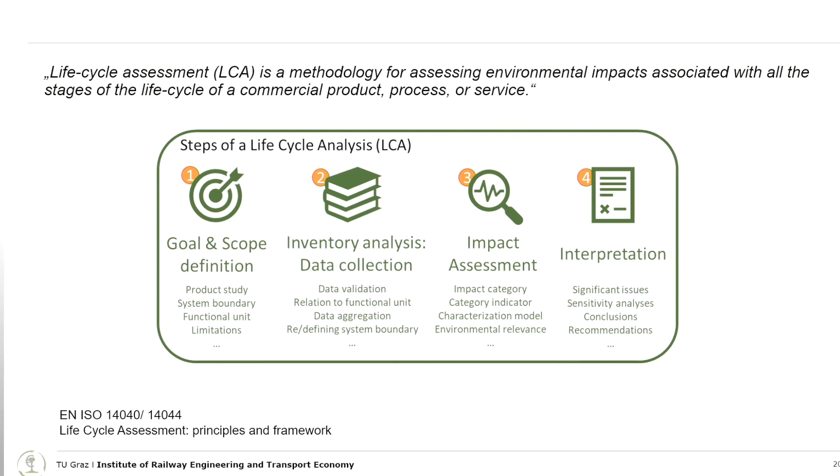Life cycle assessment is clearly defined in European regulations with its principles, frameworks, and how to evaluate and how to execute it. So the big advantage of life cycle assessment is that figures and results in the end are really comparable and transparent. The first big step of life cycle assessment is to define the goal and the scope of the study. So in our case, railway infrastructure assets.

The second big part is the inventory analysis. This is a really big part of data collection where we have to assess all the masses which are installed in railway infrastructure, also all the transport and associated processes to it. So this is a really big part of any life cycle assessment.

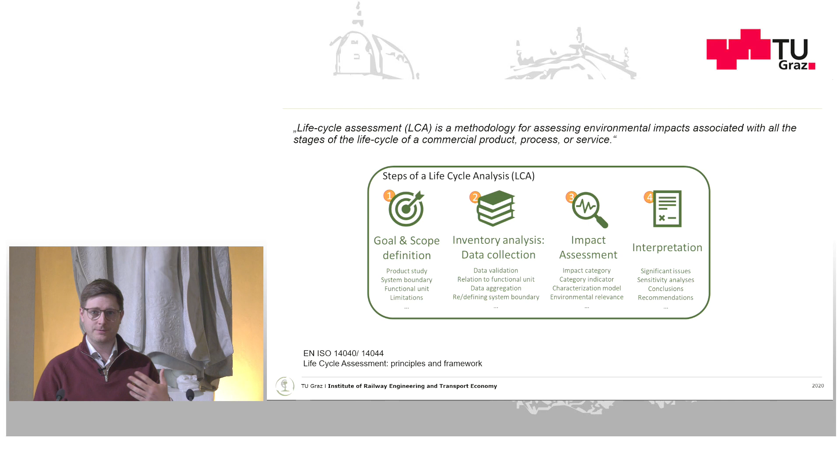And then as a third step, we have the impact assessment. So there we transfer kilogram concrete, for example, into CO2 equivalents or other impact categories which are associated to the production and construction of these masses of concrete. And the last part, the fourth step, is the interpretation. Interpreting the results, coming to conclusions and recommendations in the end.

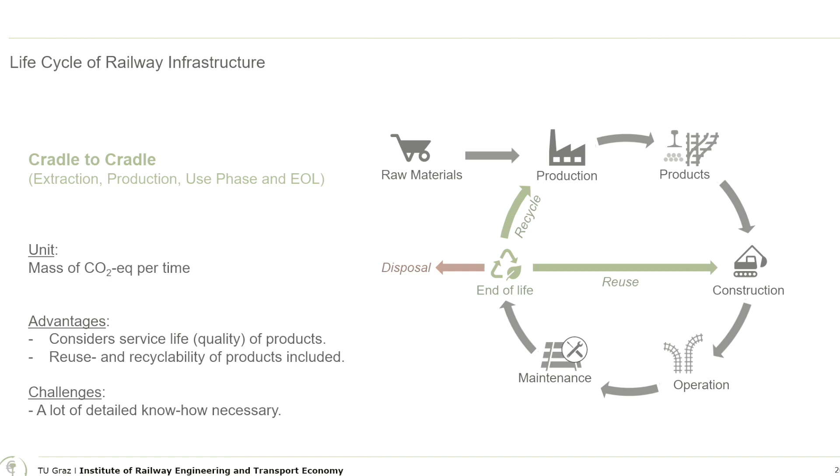As the name life cycle assessment already tells us, we deal with the life cycle of a product, and in this case of railway infrastructure. We have to start at the raw materials via production, construction, operation, maintenance, and then we come to the end of life. We should not stop at the end of life. We should really go beyond and really look on what we can recycle in the end, what we can reuse, maybe on site even, with ballast cleaning machines, for example, reusing ballast on site, and to minimize and have a very low amount of masses which we have to dispose in the end.

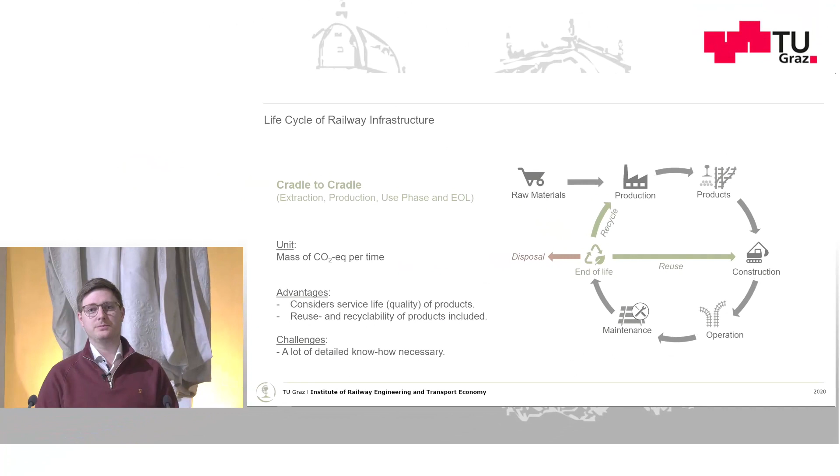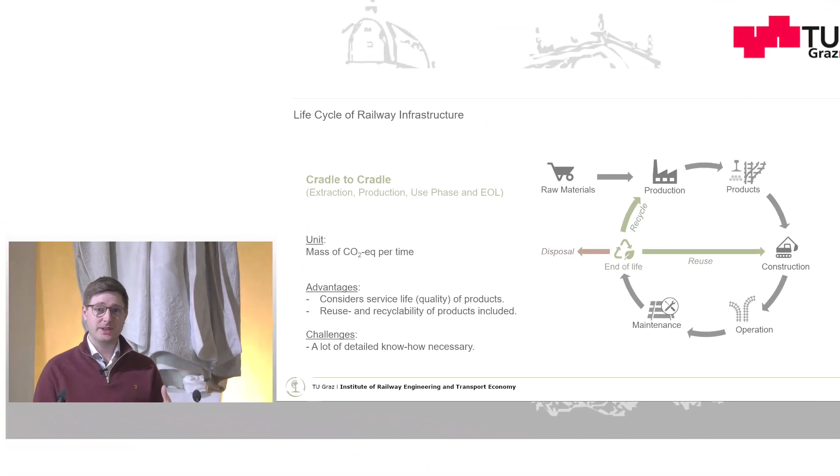The unit for such a consideration of a life cycle is always mass of, in this case, CO2 equivalent or any other impact category per time, because we want to compare also results which are based on different service lives. So we have to relate it to a time factor in order to be comparable. The big advantage is that we can include the service life, so the longevity and the quality of the products in our considerations, and also that reuse and recyclability is included as well.

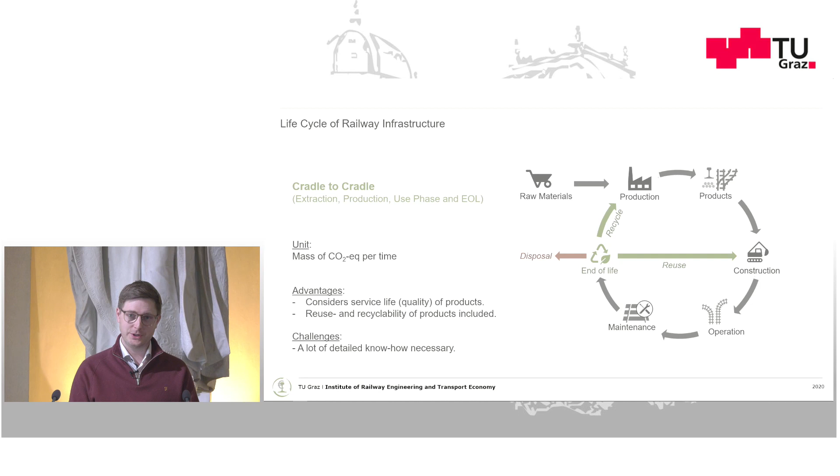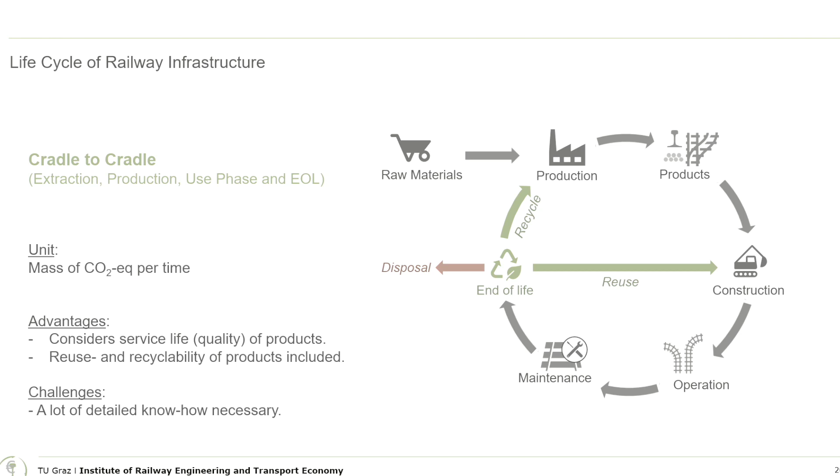The big challenge, we need information. We do not only need information about the amount of masses which are installed in our railway infrastructure or railway track, for example. We also need to know how long the track will last under certain boundary conditions, so we need to know the service life. We also need to know how many maintenance measures we have to expect over the service life. And we also need to know what processes are at the end of life and how the materials are dealt with.

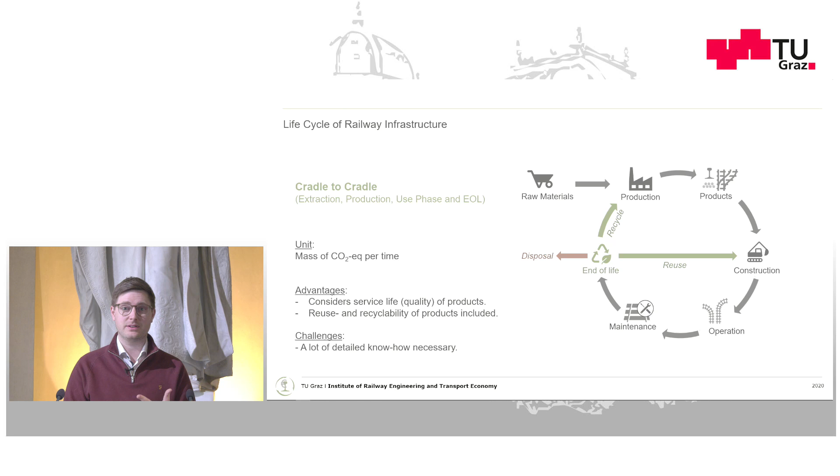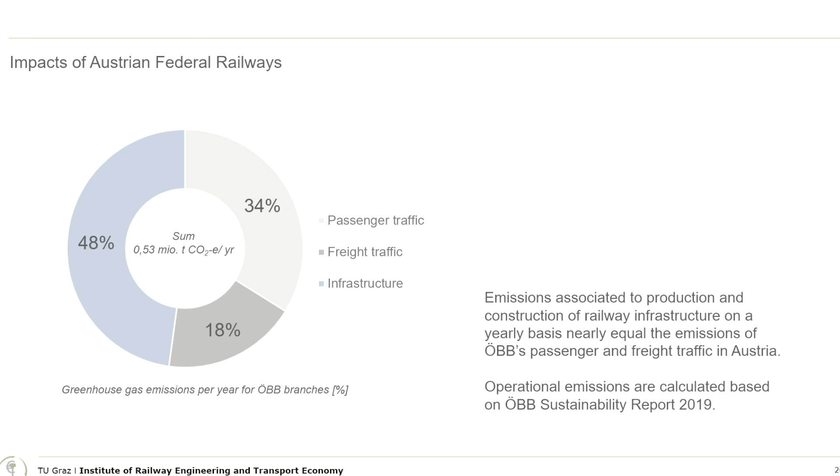When we look at Austrian Federal Railways as a whole, on a global perspective, then we can calculate, of course, the emissions which are associated to ÖBB's passenger and freight traffic. And we also calculated ourselves the emissions associated to providing, constructing, producing, and maintaining infrastructure. So in this graph, we can see that these are nearly 50-50, nearly equal. So this is just to tell you that we must not and we cannot neglect the infrastructure when we talk about environmental impacts in the railway system.

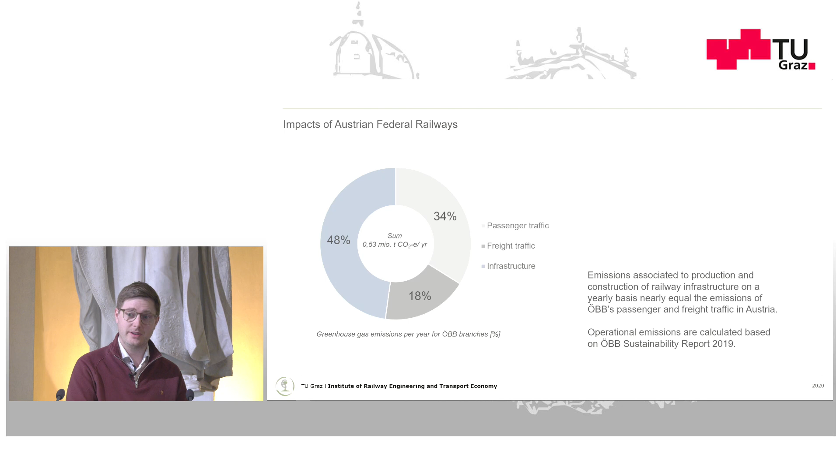There is a lot of research and development going on the right-hand side of this donut graph associated to passenger and freight traffic. We talk about alternative propulsion systems and so on. So there is a lot of research and we can expect mitigating these environmental impacts in the next decades. But infrastructure is kind of neglected up to now. So this is just to emphasize that railway infrastructure really has a big impact, and what has big impacts has also a big potential for mitigation of environmental impacts.

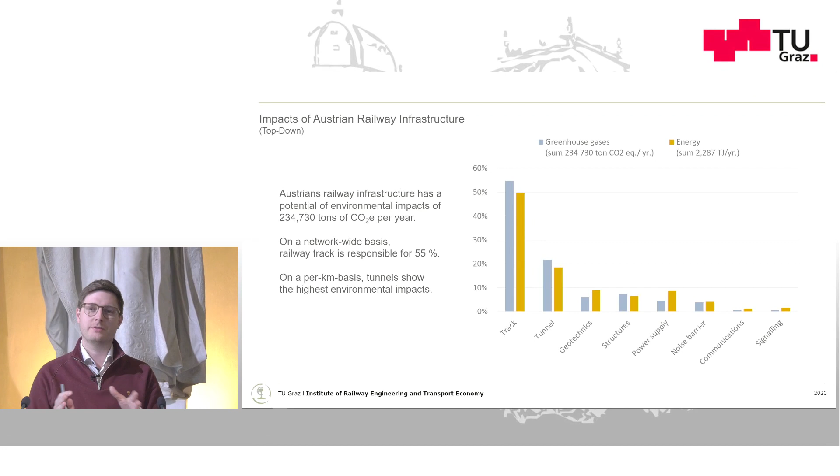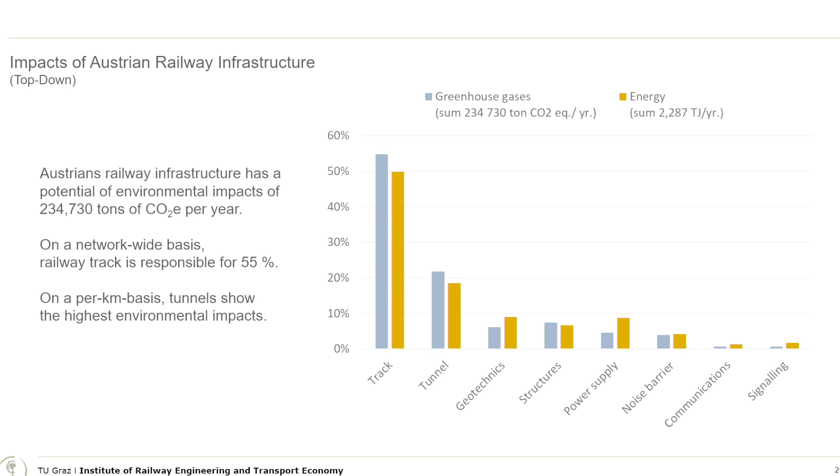If we look at the different assets of railway infrastructure, we can see that track is by far the highest contributor of environmental impacts in terms of CO2 equivalents per year. Of course, if we look at it on a per kilometer basis, tunnels show the highest impacts. But within a network, even in Austria where we have a lot of tunnels since we are an alpine country, we have way more track kilometers on open track than in tunnels. So within a network, track is by far the highest contributor of environmental impacts.

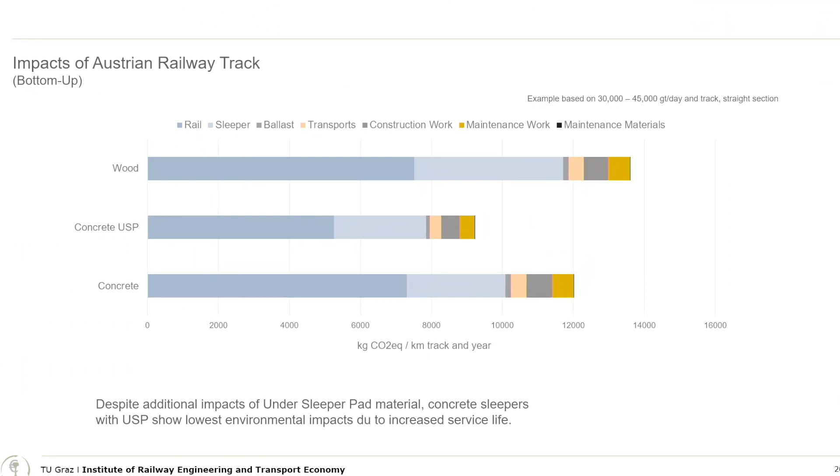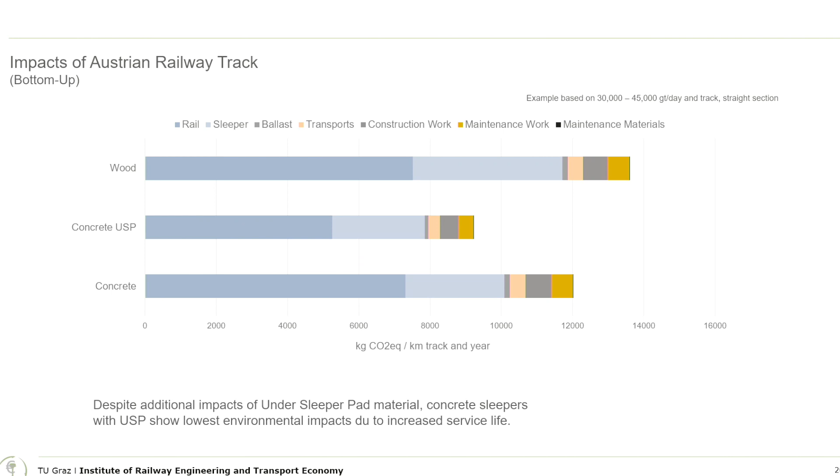This was also the reason why we looked at track very closely with a detailed approach. Here you can see a comparison of ballasted track with 3 different superstructure types: wooden sleepers, concrete sleepers, and concrete sleepers with under sleeper pads. This example is based on a certain traffic load within a straight section, so that we are comparable in this part.

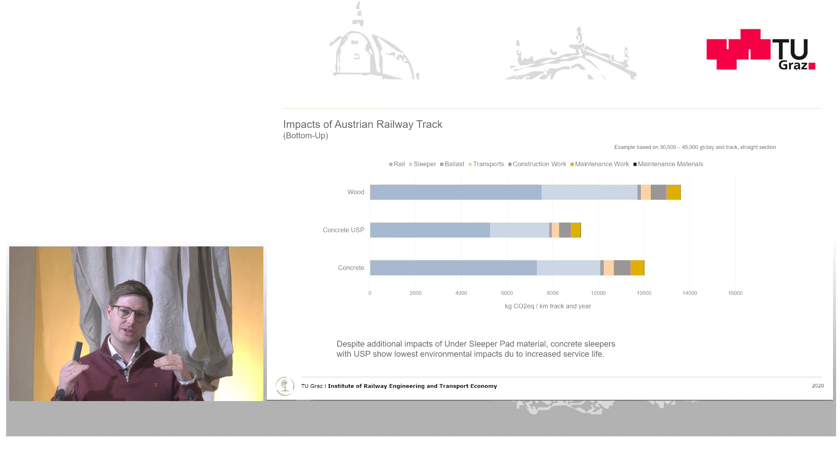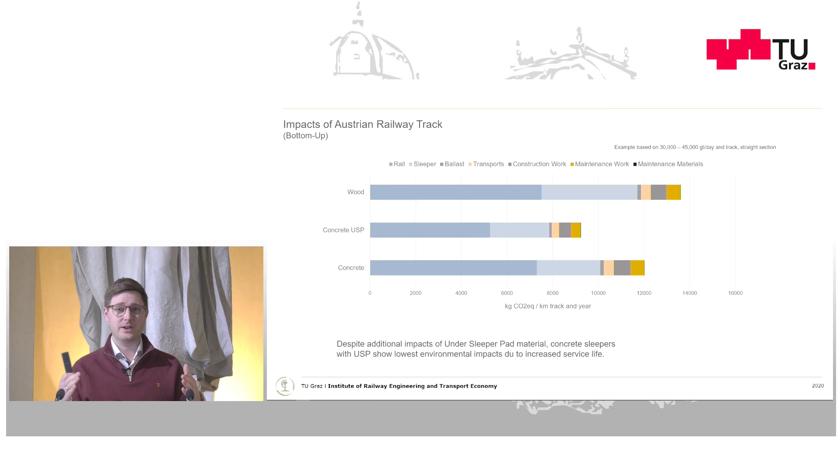We can see that despite the additional environmental impacts of producing the under sleeper pad material, concrete sleepers with under sleeper pads show the lowest environmental impacts due to the increased service life. Under sleeper pads can increase the service life by 30%. So in a per year assessment, like we do in life cycle assessment, this shows the lowest environmental impacts.

I want to show you a quick example of how we can integrate these considerations into day-to-day business, with the example of public procurement and the tendering process.

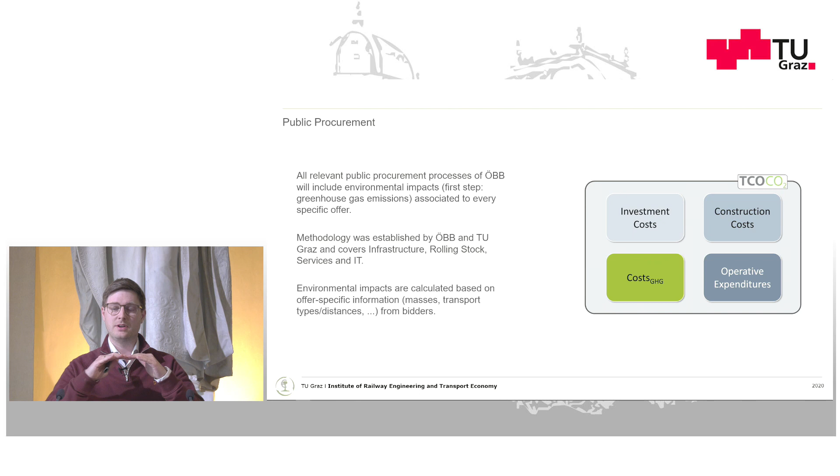ÖBB's tendering process is based on total cost of ownership, so investment costs, construction costs, and operative expenditures are included. Together with ÖBB, we developed a methodology to also include the costs associated with greenhouse gas emissions, so to include environmental impacts in this calculation within the tendering process. Since we then have it as a cost figure, we can put it on top of the total cost of ownership or integrate it into it, giving us a summed up cost figure which lets us choose the best offer within the tendering process.

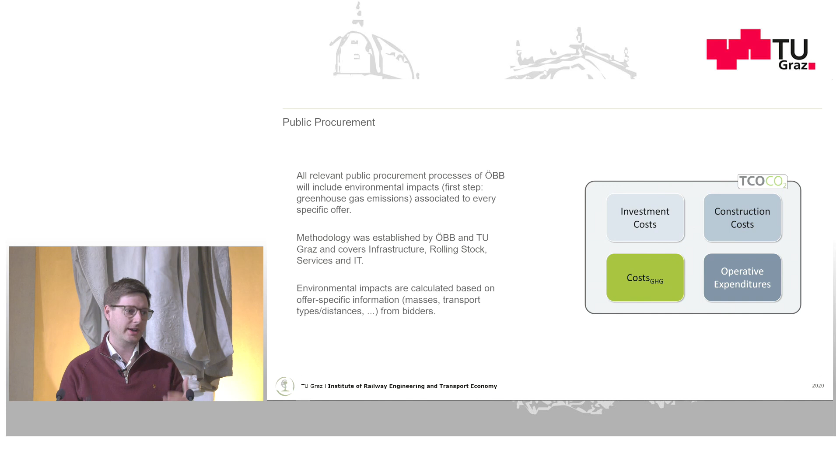The environmental impacts are calculated based on offer-specific information from the bidders, like masses, transport types, distances, processes, and so on. They're calculated using greenhouse gas emissions from production, construction, and operation. This is then multiplied with a monetization factor in order to transfer it from greenhouse gas emissions to a cost factor.

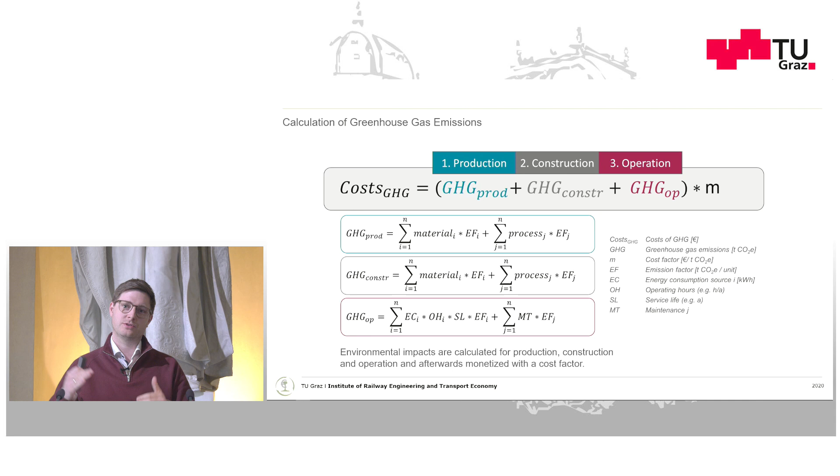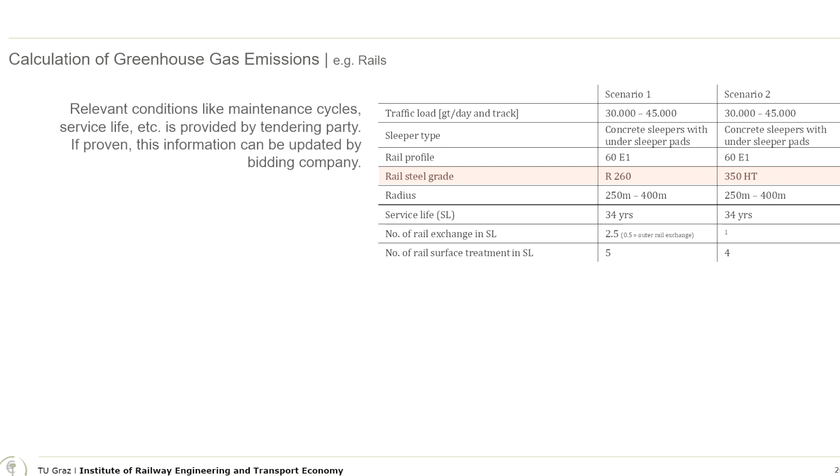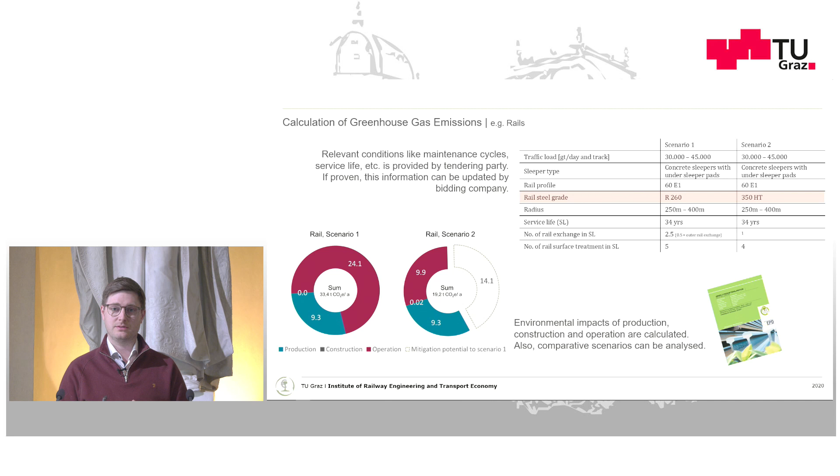One has a higher steel grade than the other, meaning we have a lower number of rail exchanges necessary throughout the service life, and a lower number of rail surface treatments necessary throughout the service life. This shows us that with scenario 2, the higher steel grade, we can save up to 40% of greenhouse gas emissions associated with rails when we use the higher steel grade.

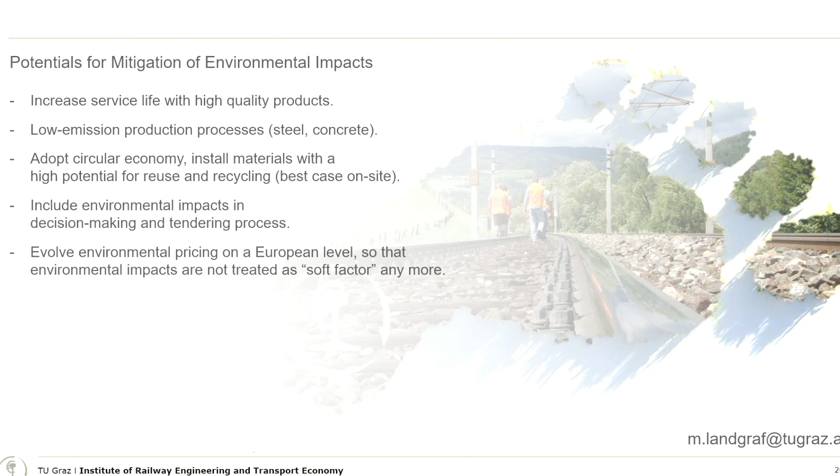So to sum it up, what are, from my perspective, the potentials for mitigation of environmental impacts for railway infrastructure? The first big part is service life. If we can double the service life, this means we just need half of the masses, half of the raw materials, half of the production process, and so on. So service life plays a big role.

Then we should put our effort into research and development of low emission production processes, especially for steel and concrete, because these two are the main contributors in railway infrastructure. We should adopt circular economy, installing masses with a high potential of reuse and recycling, best case on site, because like with the example of ballast cleaning, we can reuse the ballast stones on site, and also save the environmental impacts associated with transports.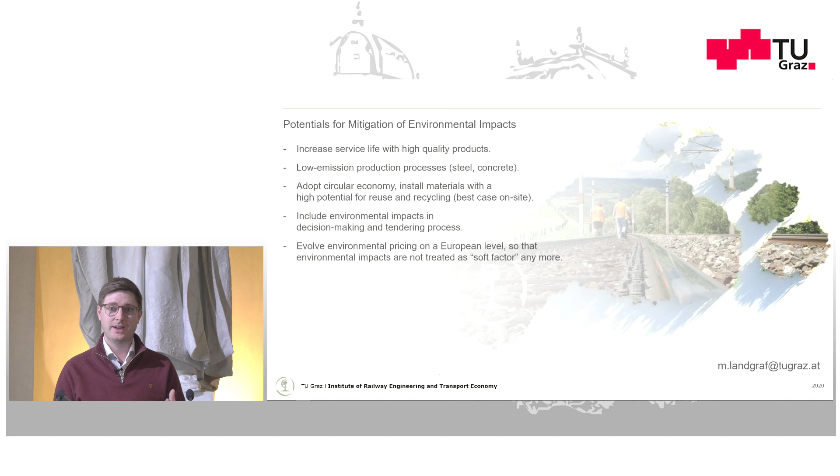We should include environmental impacts in decision making, for example in the tendering process. And we should also evolve an environmental pricing scheme on a European level so that we can transfer environmental impacts into cost figures. Then they become a hard cost factor, so to say, and it really becomes a business case for companies to reduce environmental impacts within their production processes.